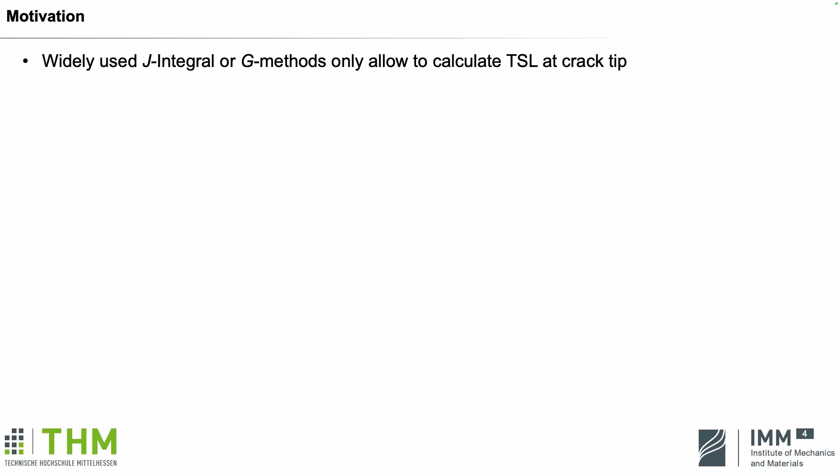Adhesively bonded joints are typically modeled using traction separation relationships as constitutive laws. However, on the way these energy-based methods are used, you usually get the traction separation law only at the initial crack tip position. So our goal was to get more data. We wanted to get more traction separation laws out of one test, and invented a method to get the traction separation laws throughout the whole beam using these optical fiber strain measurements.

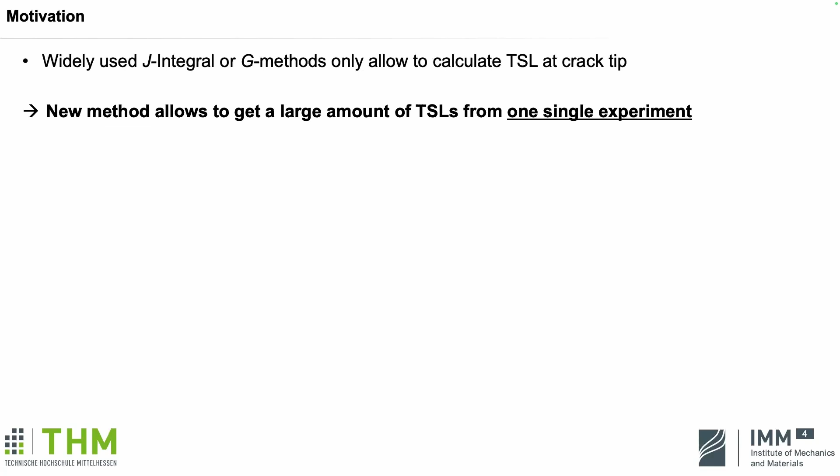So here you can see a typical test for the J-integral method, where you measure the force, the rotation, and with, in this case, a DIC, the crack tip opening displacement. After that, using the equations below, you can calculate the cohesive traction.

In our case, we used an optical fiber measurement to calculate the strain. As my supervisor said before, we get the strain at each position of the beam. And with that, we get the curvature using beam theory.

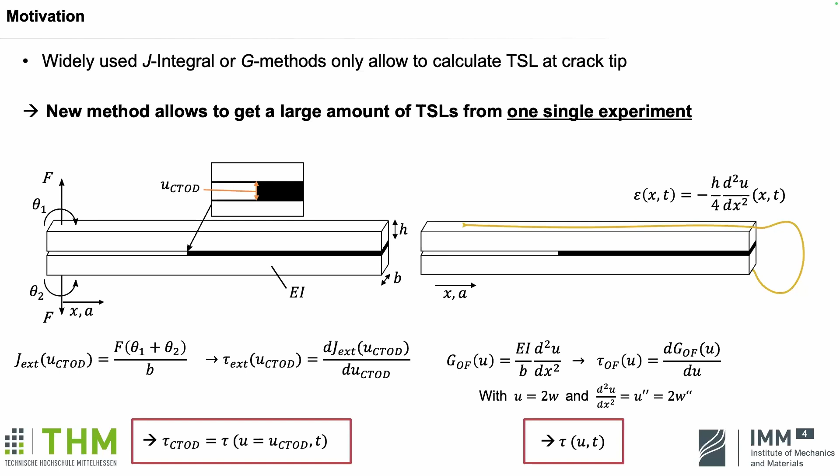Oh, I see there is a square missing in the GOF equation. Using beam theory, you get the moment, and with that, the energy, and eventually get, when you derive with respect to the separation at each position of the beam, the traction separation law at every position, not only at the initial crack tip.

So we used a mode 1 DCB test with a structural adhesive. I combined both of the setups I showed before. We used 2 inclinometers to measure the rotation, a load cell for the force, and additionally a DIC for the initial crack tip separation, and the optical fiber.

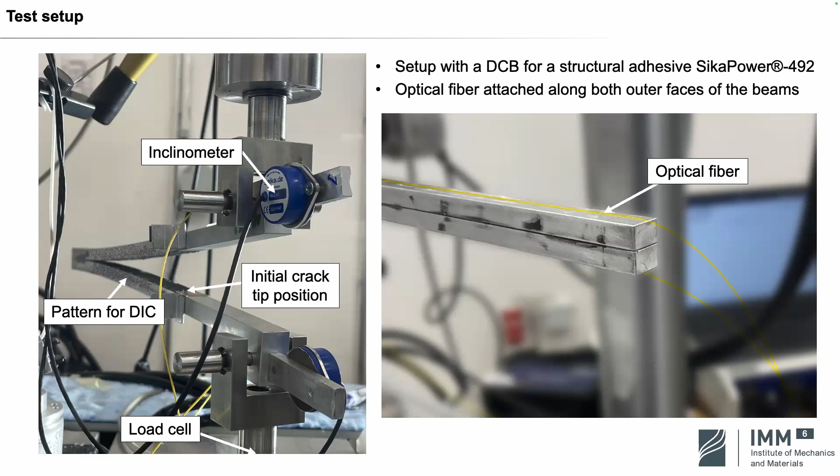So on the left, you can see how a typical, good test result would look like. On the right, you can see how some test results were looking like. Sometimes you get partly unevaluable test results where you only can evaluate one beam or only some of the time steps, but usually we get the left ones. So we assume that the minimum of the strain gives us the current crack tip position. And after that, we can evaluate the fracture process zone.

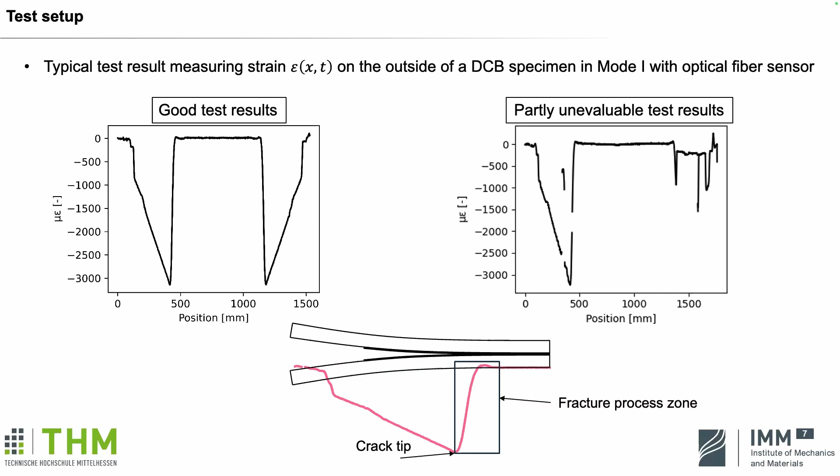So now I give a small insight into the proof of my methods, because I wanted to check if it is really the crack tip position we get, and if we are allowed to get the traction separation laws at every position of the beam.

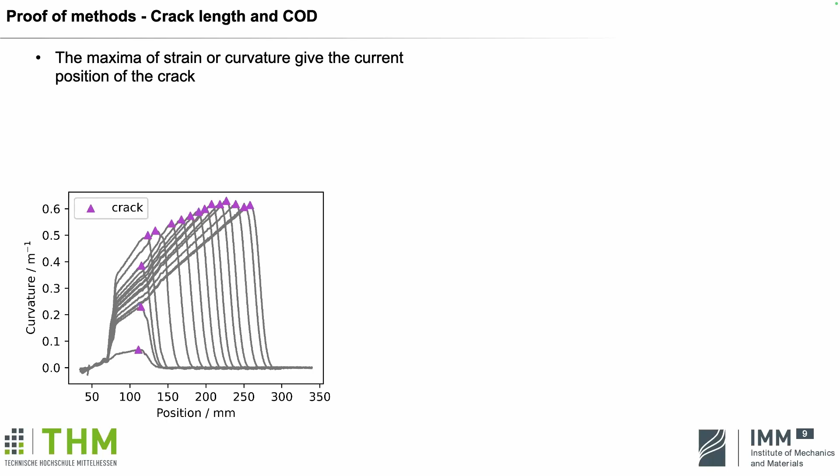So first, on the left, you can see the curvature over the position of the beam. Each curve is at a different time step. And if you evaluate the maxima, you can see that the crack at first isn't growing, and after that, you can see crack propagation. So I used a corrected beam theory approach and plotted the cube root of the compliance over the crack extension I got from my results. Did a linear fit, extrapolated it, and was able to get the correction factor delta.

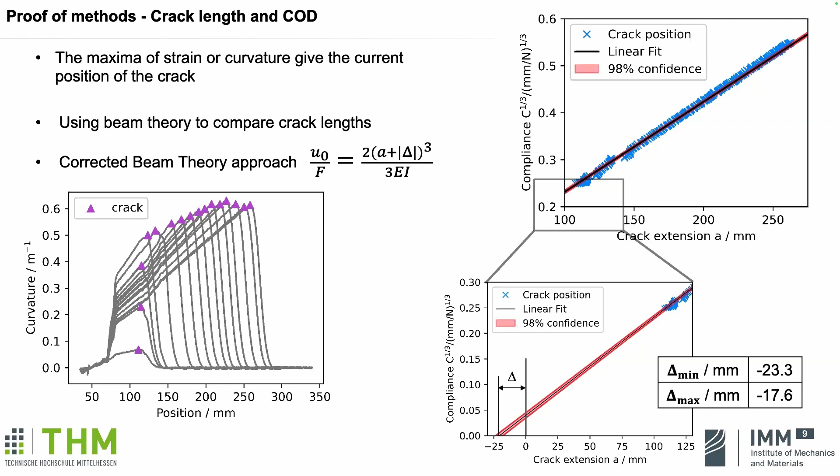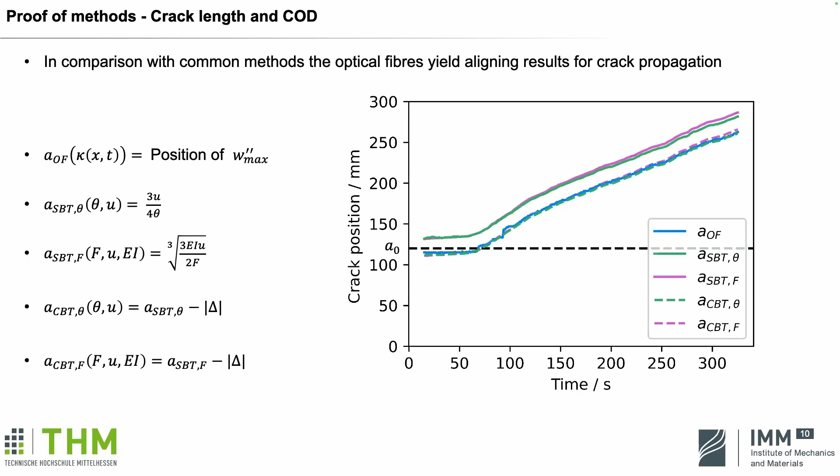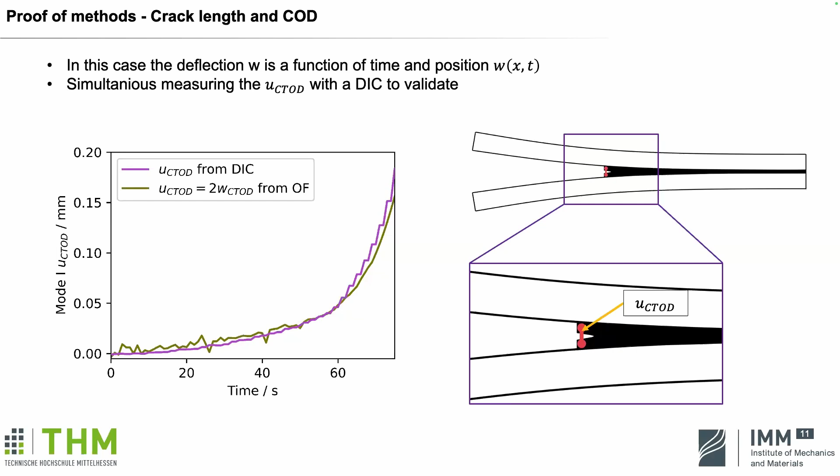After that, as I said before, I also measured the crack tip opening displacement with the DIC. So I wanted to check if this is also the same by integrating the curvature 2 times over time at the initial crack tip position. And as you can see on the left, the mode 1 separation over time looks basically the same. So now I wanted to check the energy release rate and the traction separation law.

On the right, you can see the mode 1 energy release rate. The gray lines are all my curves from my optical fiber measurement, with quite a big scattering. This is why I evaluated the mean, which is the red curve, and the transparent area behind it is my standard deviation. The black curve is my external measurement, which is from the DIC and the external force and rotation measurements. Especially at the crack tip, you can see that we get quite similar results.

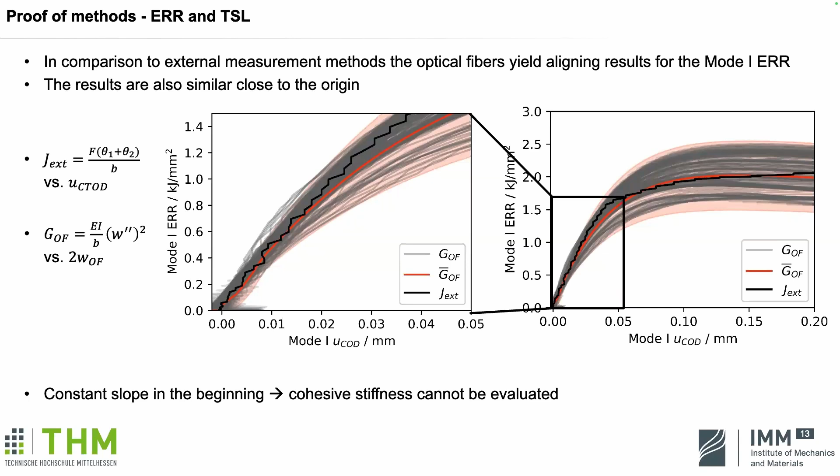But there's one problem. For the traction separation law, we need the cohesive stiffness, we need the energy release rate, and also the maximum separation. And since we have a constant slope, you will see later on that we can't evaluate the cohesive stiffness from this. So what we used was the method of the Winkler elastic foundation.

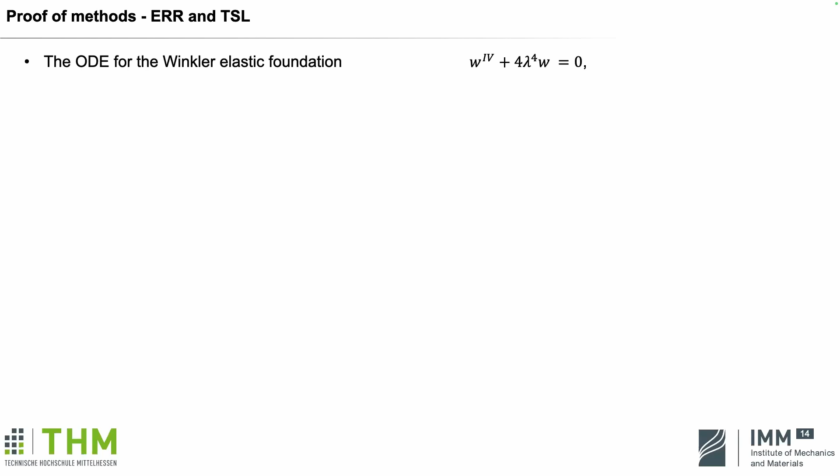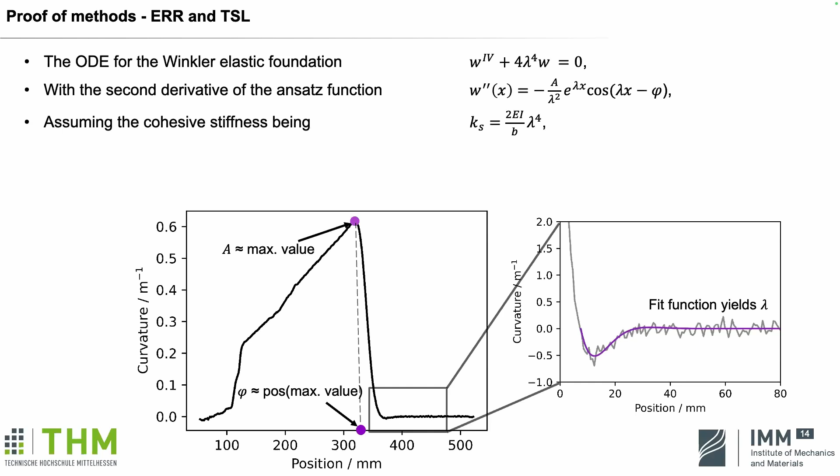And if you take the ansatz function and derive it 2 times, you get basically the curvature. So we were able to fit this onto the curvature we get from the optical fiber. And what was very nice was that we can get the initial guesses directly from our measured data. And with that, you get the lambda. With lambda, you get the cohesive stiffness. And when you integrate the data 2 times, you basically get the deflection, which, if you multiply it by 2, gives you the separation.

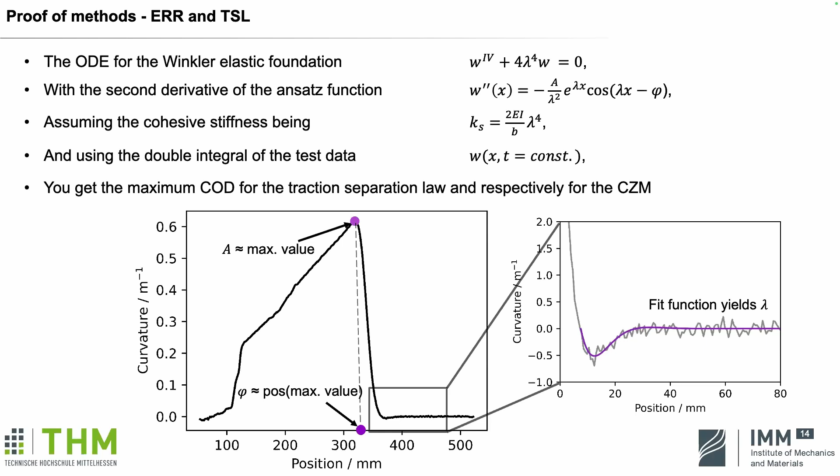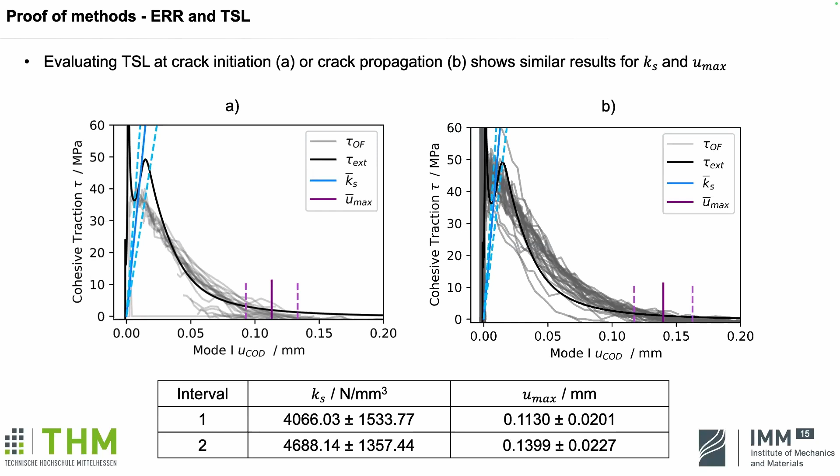So now these are the traction separation laws, which I got by deriving the previous ERR curves. The gray curves are my data, which I separated into 2 parts. A is the crack initiation and B is the crack propagation. Just because I had so much scattering, I wanted to check if there's any problem in the beginning. But as you can see down there, the data was different, but it was okay because of the big scattering. The black curve is the external measurement. The blue lines are the cohesive stiffness I got from the Winkler elastic foundation, and the purple interval is the maximum separation I got from integrating.

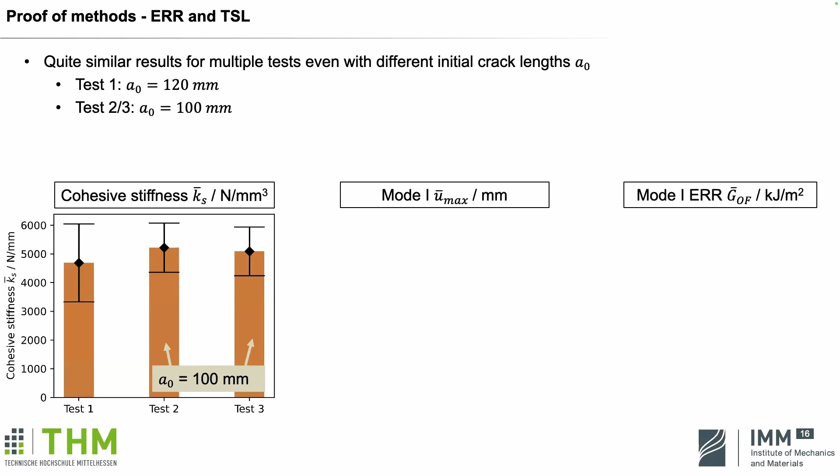So now I have a lot of statistics from one test, but after that I wanted to do some more tests. So I did 2 more tests with a different initial crack tip position and wanted to check the 3 parameters I need for my traction separation law. As you can see, for the cohesive stiffness, I get basically the same results. Same for my maximum separation. For the external measurement, I brought up a criterion for myself: I used 5% of the maximum stiffness and said that at that point, there's basically the breaking point. And for the ERR, I also get quite similar results.

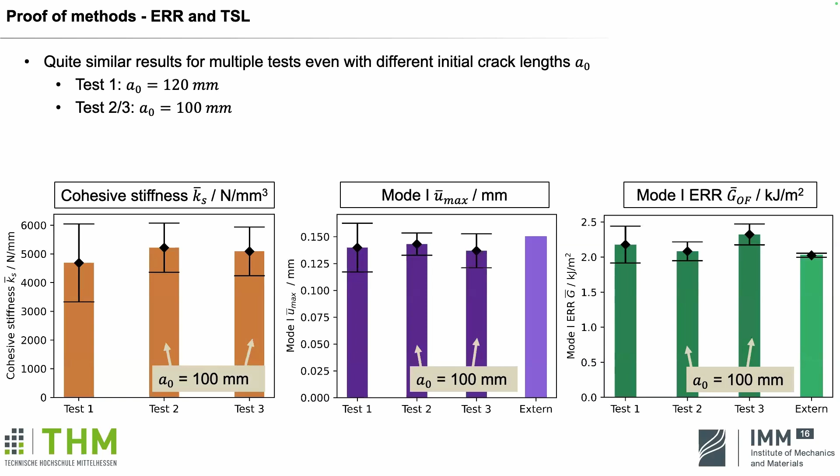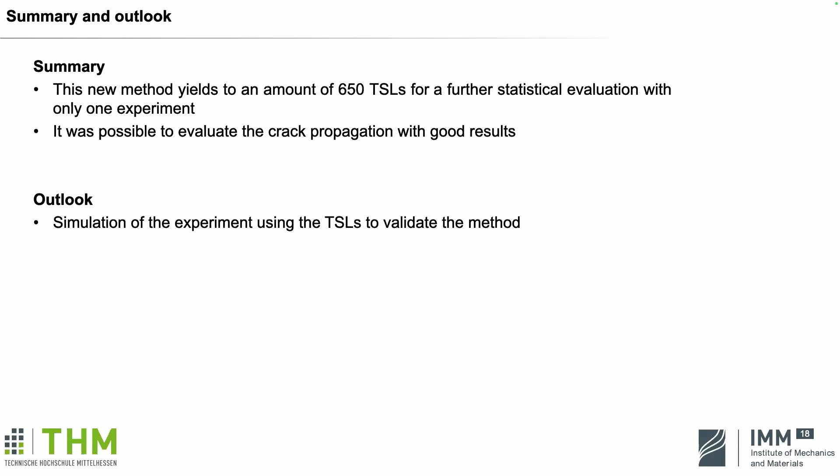So, a quick summary: from one test, I got about 700 to 750 TSLs, from which I was able to use about 650. So all in all, I got over 2,000 to 3,000 TSLs from the 3 tests. I had good results with the crack propagation. And for the outlook, I want to simulate the results, but I think I need to think about what the next step is. Thank you very much.